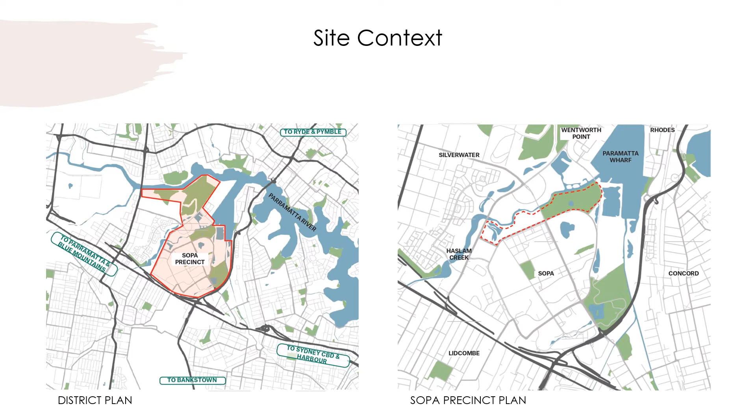The maturing parklands will become Sydney's great green lung, playing an increasingly important role in the city's recreational and environmental life. The project site, Kronos Hills and Wentworth Commons, contain remediated landfills, freshwater wetlands, frog ponds and underpasses, providing a primary habitat for endangered fauna species.

Furthermore, with its large open recreational spaces, it provides ample facilities for all ages for public leisure and play activities, including public art pieces, walking and bike trails, and a children's playground.

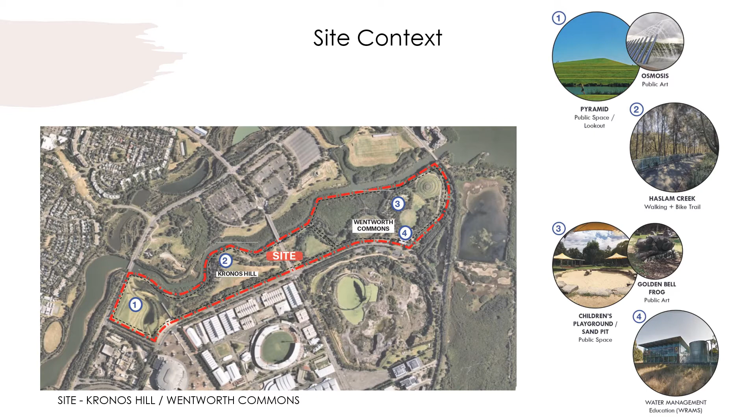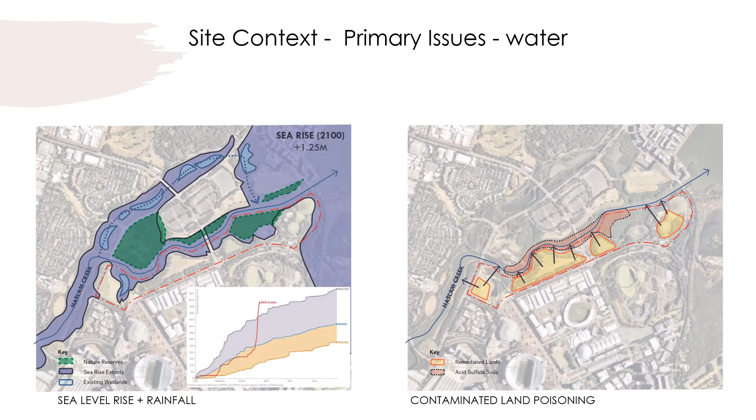The site is affected by primary issues like destruction of natural reserves and ecosystems due to rising sea levels from increasing rainfall averages, detrimental environmental effects on humans, flora and fauna caused by contamination to land from naturally occurring sulfides, and to the groundwater system from leachate precipitations.

Aside from environmental issues to consider, we will also be looking into developing a precinct that can accommodate the significant increase in demand for more facilities and amenities to address the current amenities under high duress from fast developing neighborhood communities and increased visitor rates.

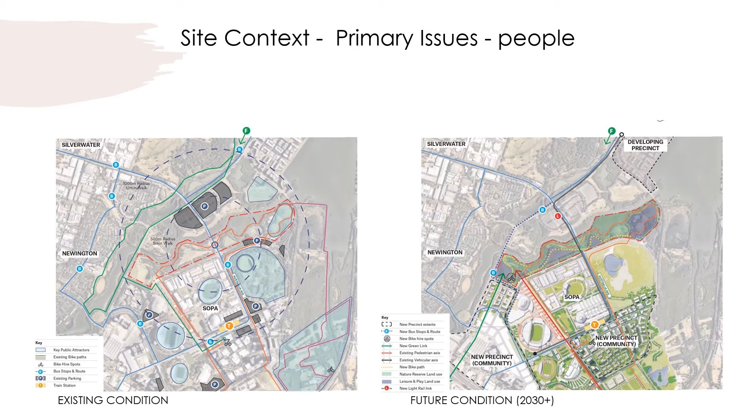We investigated two case studies related to our primary issues with water, how rainwater can be harvested and utilized in cooling, irrigation, and landscape design.

The other case study, the Art Center project, explores opportunities with an unused remediated land site in China that has been transformed into a public venue through clever integration of the architectural structure with the contaminated landmass through minimal structural points of contact with the ground.

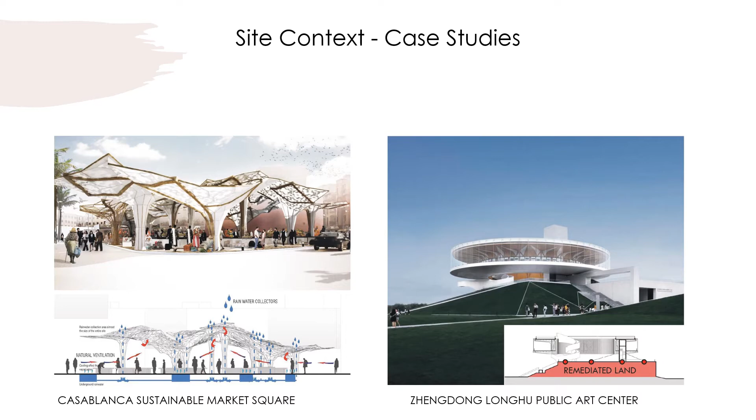Site development aims to address and meet the key targets for the UN sustainability goals of climate action, clean water and sanitation, life below water, and affordable and clean energy.

The key targets we will aim to achieve are: take significant action against degradation of natural habitats, halt the loss of biodiversity, and protect and prevent the extinction of threatened species.

Furthermore, protect and restore water-related ecosystems like wetlands and creeks, include water harvesting, desalination, supply of fresh water, and educating communities on water management.

Script 1 explores the tectonic form and draws inspiration from spiderwebs and climbing frames, and Frei Otto's exploration of use of lightweight, tensile, and membrane structures.

It works on a rule-based system of selecting minimal points of contact and elevating structures above ground at different volumes and scales for humans, flora and fauna habitations. The script is driven by three main conditions: minimal points, jitter frames, and bug volumes.

Script 2 explores the project's synthetic nature by Vlad Tenu, which is a collection of prototypes that involve nature-inspired algorithms, mathematical relationships, and geometrical constraints, creating morphological design species that explore spatial quality, materials, and volumetric intricacy.

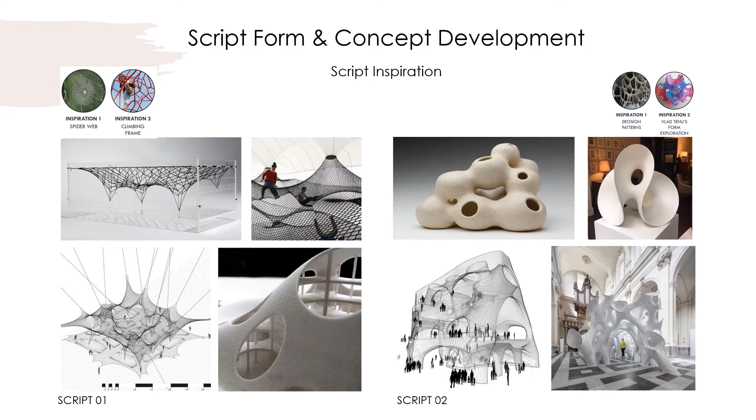We are interested in exploring futuristic construction and material technologies like automated fabrications through programmed robots using composites involving dynamic materials responding to climate changes and flexible materials like synthetic fibers.

An example of composite material exploration is looking into harvesting sea salt from the increase in sea levels and encasing it over locally sourced recycled steel members.

Exploration also includes potential panel inset options with flexible metals like thermo-bimetal products or solar panel insets to address heat reduction and energy harvesting issues.

We will further explore these processes in terms of providing future-proofing solutions to adapt construction technologies to the climate change problems.

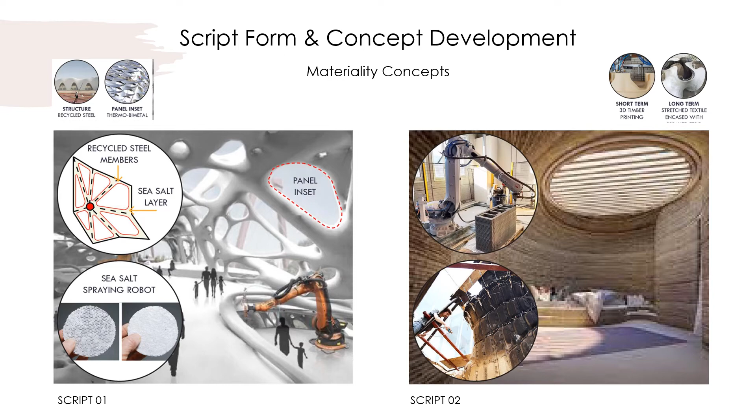Choosing a section of the site that exhibits varied elevations of remediated lands, significant flora species, and frog ponds with human walking and bike trails crisscrossing, these site considerations led to the conditions that drive the script development.

Condition 1 is minimal points, exploring creating structures over remediated lands at varied elevations through picking certain safe anchor points.

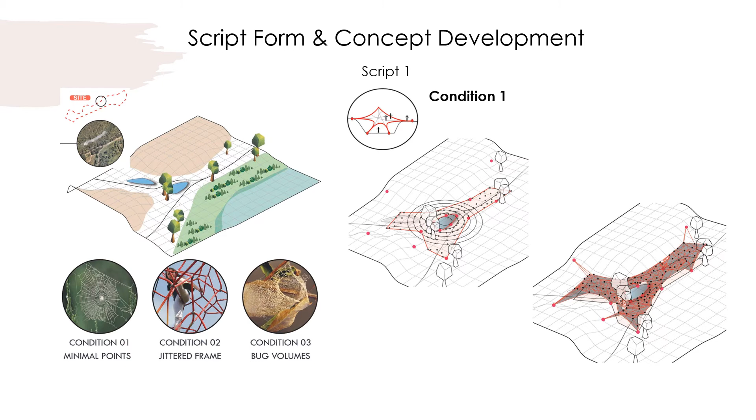Condition 2, jittered frame, explores creating a matrix of 3D connected points based on existing trees and existing site urban elements that allows traversable spaces at human scale and at more concentrated junction spaces for both flora and fauna to inhabit.

Condition 3, bug volumes, explores creating a collection of interconnected volumes that allows for building enclosed spaces for inhabitation at varied scales for both humans and flora and fauna.

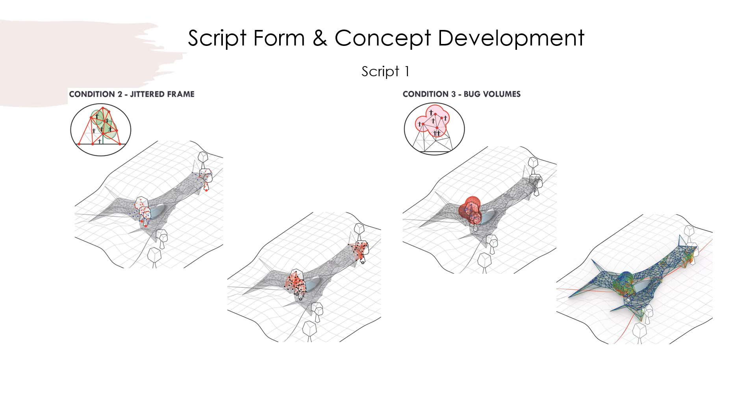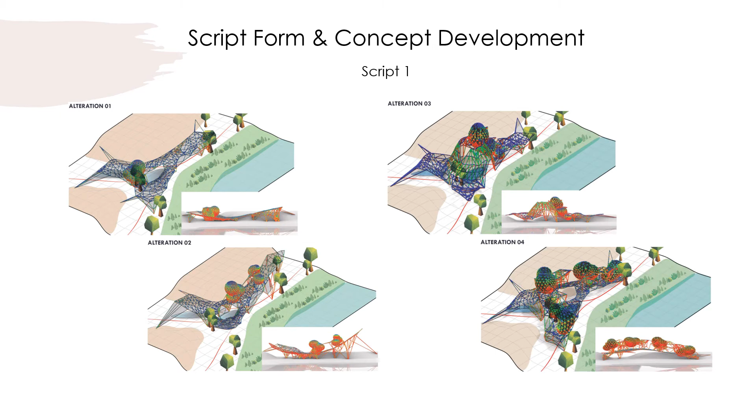These are the iterations derived from the base model, exploring various anchor points, various scales of enclosed space volumes, and varied z-value heights of points based on graph mappers that calculate fall according to water flow directions, producing iterations efficient for rainwater harvest. Views show mutual habitation of the structure by humans, flora, and fauna, as well as a potential scheme of rainwater harvesting and redirecting the harvested fresh water into wetlands or frog ponds.

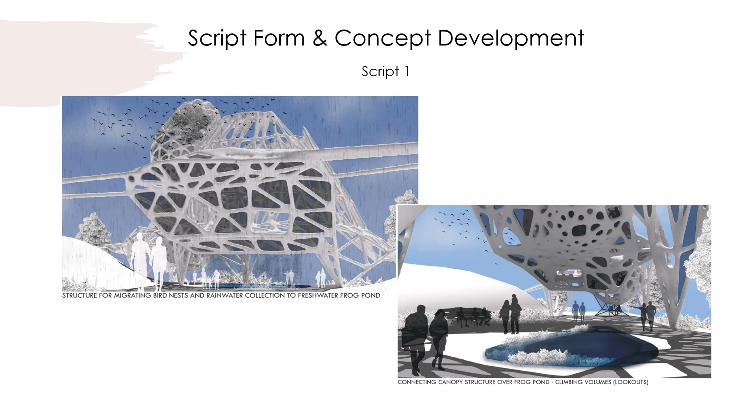The best way to reconstruct this unit for a better understanding is to think of it as a minimal surface made from three loops tabbed perpendicular to each other around a strip. The other way to reconstruct this unit is to imagine it by extending the handles towards the vertices of the construction cube to form a sphere.

A triply periodic surface, or in simple words the one we have at hand, offers great scope in generating a wide range of forms that are rich in spatial quality and volumetric intricacy.

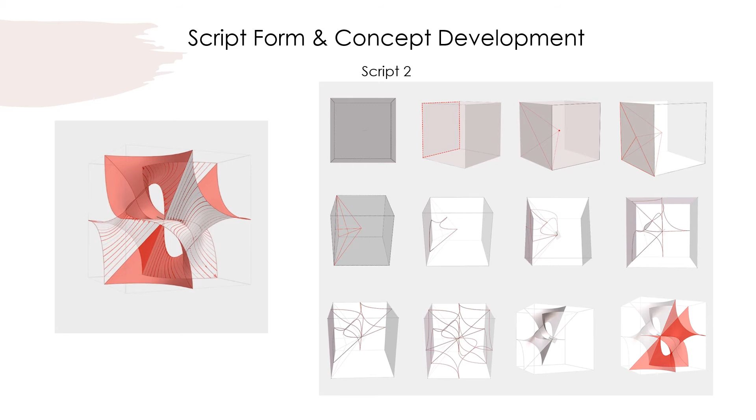The base unit for form exploration is built in a cube with control points based on one of the faces of the cube. Since the base form is built by mirroring one single surface along radial planes, changing any parameter will result in uniform change throughout.

As the next step in the generative design process, the resulting iteration is mirrored along two adjacent faces of the construction cube. A simple box array was avoided. Surfaces were trimmed out at different points using basic geometries like sphere and cube.

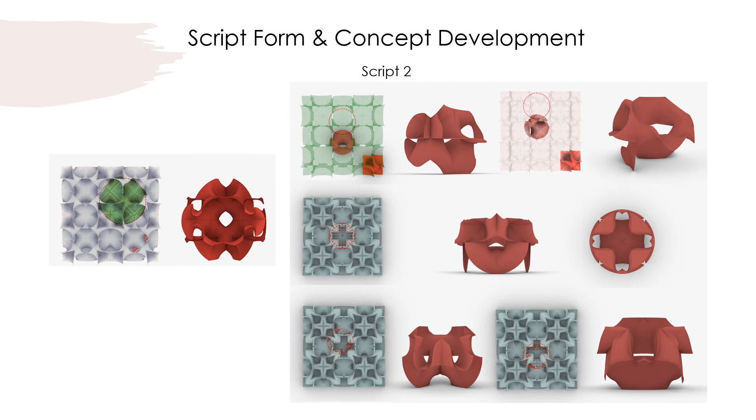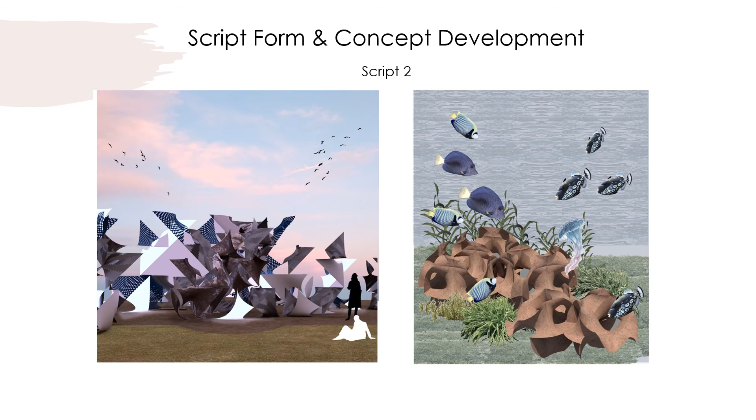The two scripts come together to perform like a hybrid structure, offering amenities at human-centric scale as well as flora and fauna scale. Script 2 will create the human-centric stereotomic forms according to function and habitation requirements.

At a smaller scale, Script 2 will provide art installations and street urban elements. Script 1 will act as the tectonic structure connecting the main function zones as well as providing environmental concept solutions for rainwater harvesting, hosting fauna and flora habitats, and shading exposed walking and bike trails from direct heat.

There will be four key human-centric structures in our precinct concept. Starting at the Discovery Center, visitors can hire a bike and journey through the canopy structures to the water management pavilions and flora and fauna management pavilions, where they can learn all about the environmental strategies in play.

The visitor then reaches the leisure and play zone at Wentworth Commons, where they can relax and enjoy new public amenities like open-air cinemas and amphitheater spaces. The journey then ends by continuing on the bike path as it winds back to the Discovery Center, providing the community a unique amenity to explore with a very particular experience.

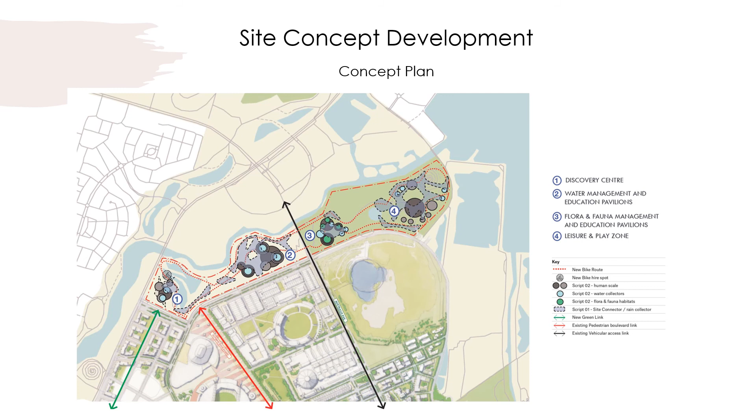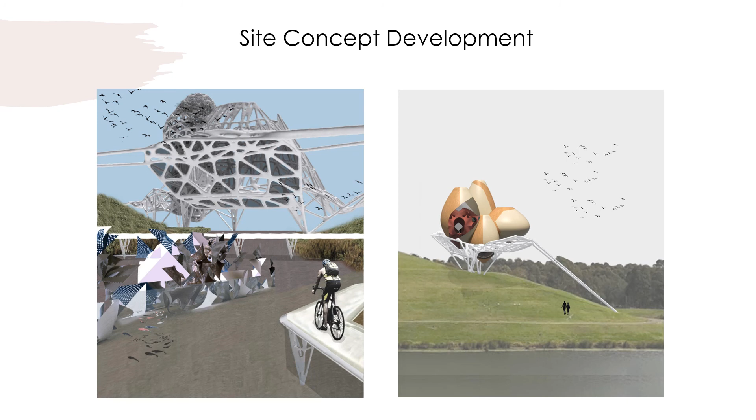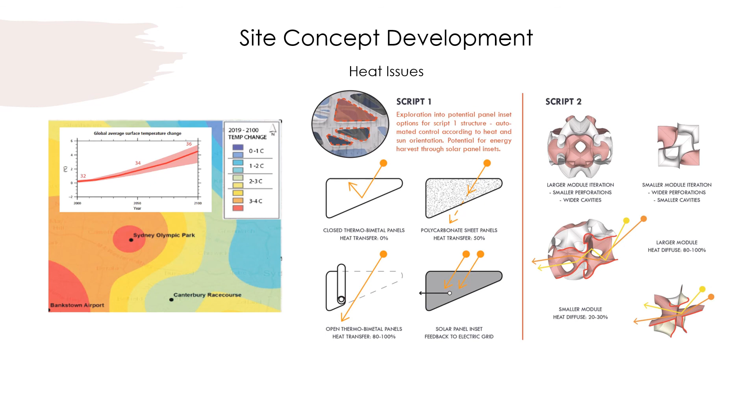Script 2 modules provide opportunity as enclosure elements that can diffuse heat transfer through the structure according to the module scale and void configurations. The scripts jointly offer potential opportunities in construction for on-site 3D robotic construction or prefabricated modules that are transported to site by drones.

There are also iterations that we can create as joinery elements and load-bearing elements at various scales according to different wind load pressures. This will be further explored in phase 2.